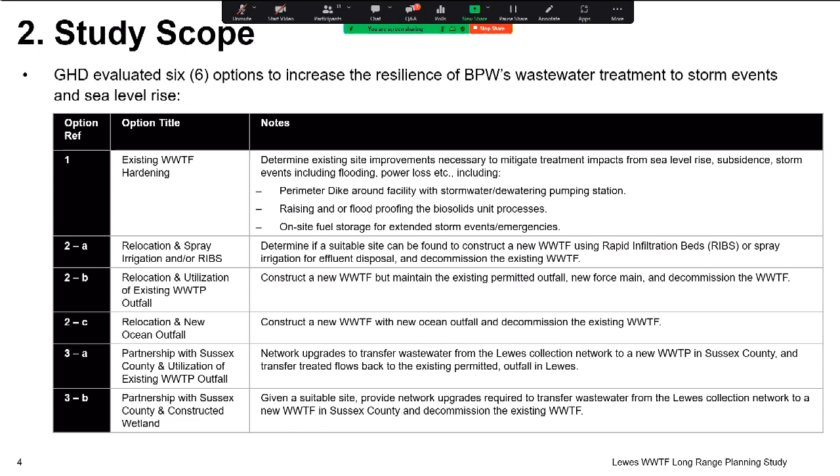So that's a high-level overview of the options. I'll go through each one schematically as we go through the presentation.

Before we get into the concepts and how we've developed them, I just want to touch on some key design criteria for the study. The first one being flood elevation.

As we've already mentioned, a key driver here is to have resilient wastewater treatment facilities here in Lewes. And if we're going to design to specific flood elevations and really understand the risk associated with the future facility, we need to understand what the flood risk is now.

Again, this is a long-range planning study, so we need to project forward to that planning horizon of 2050 and make projections on what the flood elevations will be out into the future. So I'm going to talk you through that process and summarize how we've arrived at these critical values.

To undertake this task, we start with the base flood elevation, defined by FEMA as the elevation of surface water resulting from a flood that has a 1% chance of equaling or exceeding that level in any given year, which is what we refer to as the 100-year flood elevation. Statistically, it would be expected to occur once every 100 years. It's established industry best practice that wastewater treatment facilities should be protected from the 100-year flood elevation, so that's why we start with the base flood elevation.

The graphic on the top right-hand side of the slide is from the most recent FEMA mapping, which was completed in 2015. We've shown the outline of the existing treatment facility in red, and basically for the majority of the site, the 100-year flood elevation is 7 feet.

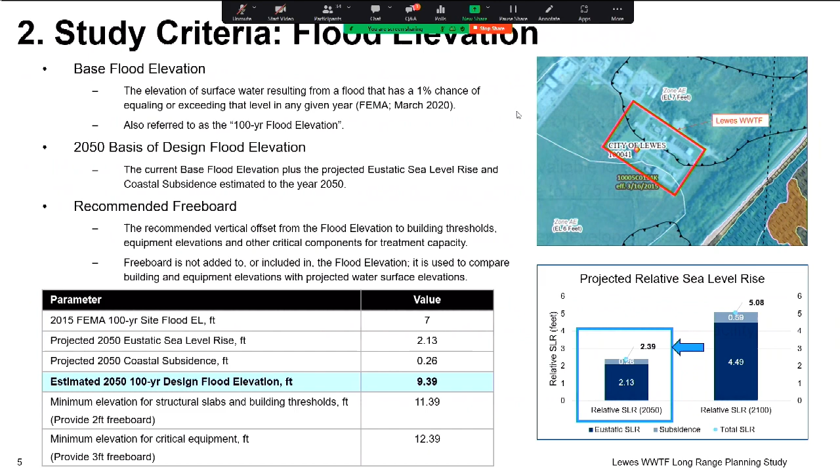The next key criteria are wastewater flow rates. The existing treatment facility here in Lewes is rated for an average day flow of 1.5 MGD, million gallons per day. The current observed average daily flow is actually around 0.9 MGD, so currently the treatment facility typically operates at about 60% of the rated capacity.

The BPW has conservatively estimated that, assuming all available lots are developed per the current zoning designation, the 2050 average day flow will increase from 0.9 million gallons per day to 1.75 million gallons per day. So the concept arrangements for all of the options discussed today have been developed assuming an average day flow from the Lewes collection network of 1.75 MGD.

Under the option 3 scenarios, the partnership with the county, these have all been developed on the assumption that the county in the new facility will contribute an equal proportion of the flow rate to the new facility. So we assume 1.75 from Lewes and 1.75 from the county, giving a total 2050 average day flow for the option 3 facilities of 3.5 MGD.

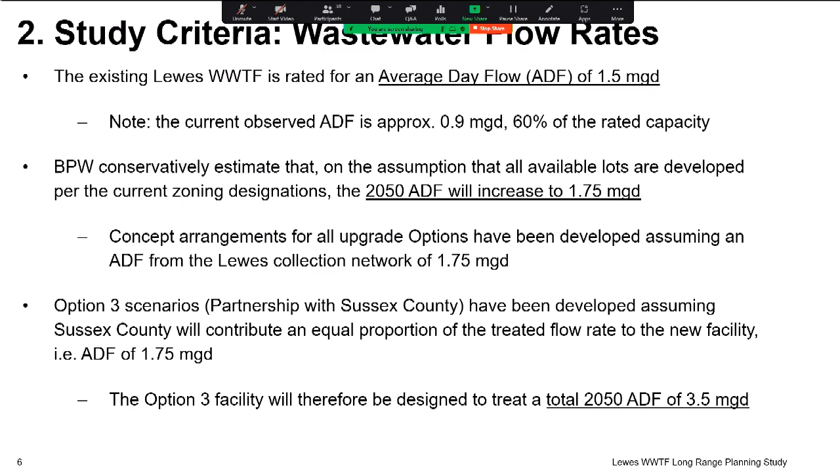The other key criteria is water quality, specifically the water quality for treated effluent. The overriding design criteria and key assumption underpinning all of the concepts is that, irrespective of the option, the future wastewater treatment facility will meet all of the conditions of the existing permit.

Under the option 1 concept, which is to improve the existing treatment facility, that would maintain the existing membrane bioreactor, or MBR, treatment process. Under the option 2 and option 3 concepts, they were developed on the basis of an activated sludge treatment facility with tertiary effluent filtration. I won't go into the details of how they differ, but both are established technologies, and under both it's feasible to meet all the conditions of the existing permit, even at the increased flow rates projected for 2050.

I also want to talk about the relationship between the performance of the existing wastewater treatment facility today, how that relates to the existing permit, and how that in turn relates to future facility performance. As noted, the existing treatment facility operates at about 60% of design capacity, and when operating under those conditions you get much longer retention time in aeration basins, and the key process equipment is loaded at a rate significantly below its upper limits.

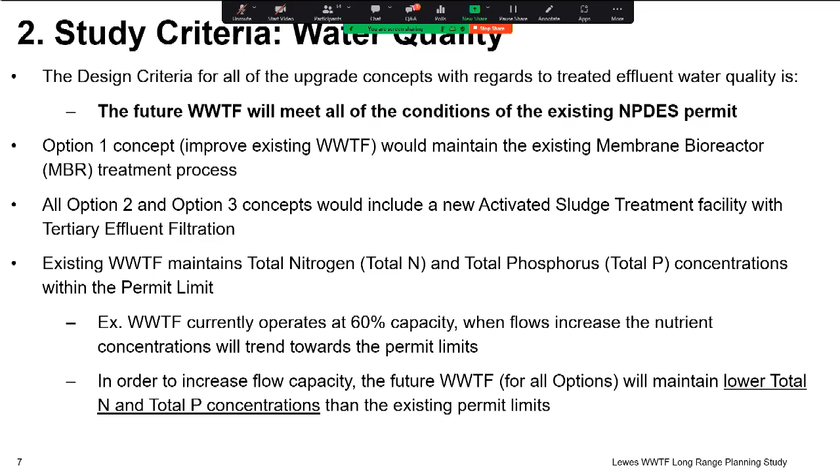So those are the key criteria that we use to develop the concepts. Now I'm going to talk through each one in turn.

We'll start with option one, which is hardening of the existing plant. On the handouts and slides, in the top left-hand side, we have simplified schematics for how each of the concepts will work, and I'll start by talking through that. The two orange boxes represent the two parts of the Lewes collection network, which is broadly split into two halves, the northern network and the southern network, either side of the canal.

Each part of the collection network currently terminates at a lift pumping station. The southern collection network ends at lift station number 4, on Gills Neck Road, close to the bridge on Savannah Road, right in the center of the city. The northern collection network terminates at lift station number 8, on American Legion Road, close to the treatment facility site. Both pump stations transfer flows into the existing wastewater treatment facility, which discharges via the existing permitted outfall.

So under option 1, the key upgrades are hardening of this facility from a stormwater perspective. The key features of that are a perimeter barrier, which I'll talk about in more detail shortly, and a stormwater pump station to clear runoff from within the site.

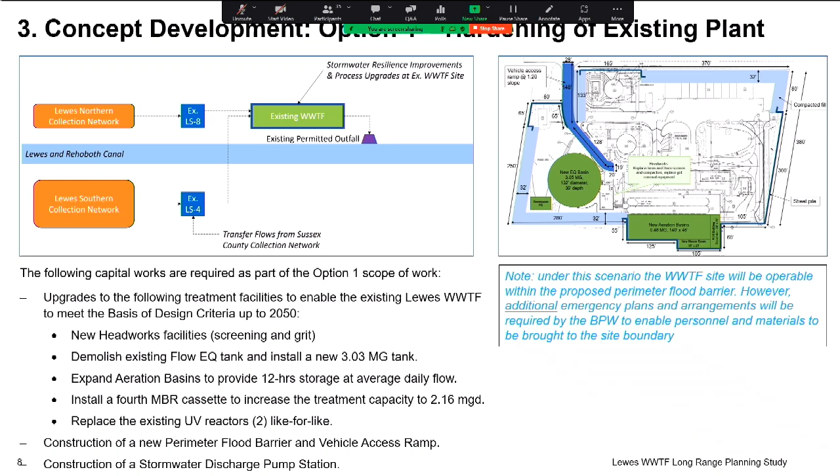Some additional details on the proposed upgrades. We're showing an expanded plan here, showing the perimeter, and in the top right-hand side, a typical section through a compacted fill flood barrier.

This would be compacted fill with a plastic liner on the external side to provide waterproofing, along with a trench where the barrier would extend down into the ground to prevent floodwaters passing beneath it, and a drain on the inside. This is the preferable approach because it's cost effective and will provide the necessary protection up to the flood elevations discussed earlier.

However, in order to provide those threshold elevations, the barrier with the slopes shown, which could be maintained, would be about 30 feet wide. So there are certain parts of the plant where, without considerably changing the location of the site fence, it's not possible to install a barrier that wide.

In those locations, we're showing a sheet pile barrier, shown as the bold, thin lines on the graphic. That would reach the same elevation and provide the same level of protection, but with a smaller footprint. It's not as preferable as the compacted fill on a cost basis, so wherever possible we use the barrier, otherwise it would be a sheet pile. There'd also be a stormwater pump station to transfer flows over the barrier.

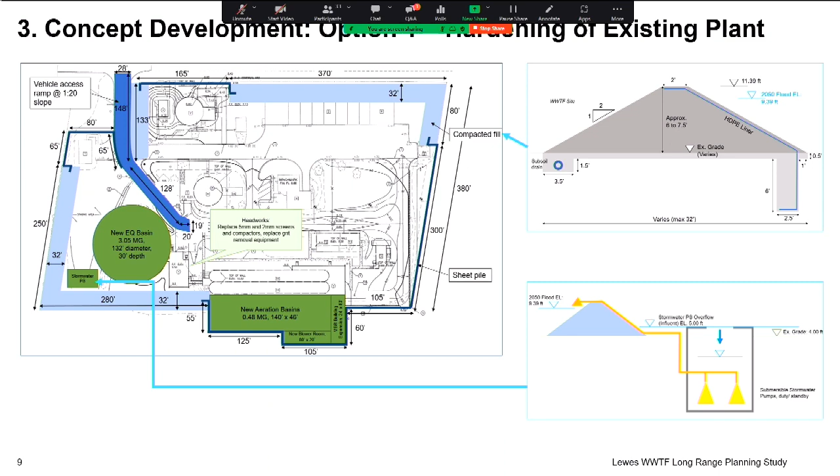The process upgrades are shown in the green boxes, showing the key areas of the site that would need to be upgraded. There's a lot more detail available on this within the report, and if there are any questions later on, I'd be happy to talk through any of the more specific items.

Okay, now we're into option 2, which is option 2A: to relocate the plant to a high elevation site and discharge via spray irrigation.

I'm going to start by talking through a similar graphic, which shows the northern and southern collection network either side of the canal. Under the option 2 concepts, a key part is, in order to transfer the raw wastewater from the Lewes collection network up to a new site, we need to consolidate it all at a single pump station.

Our preference would be to expand lift station 8, which is north of the canal, and make that the consolidated pump station, which would transfer all of the wastewater from the Lewes collection network up to the high elevation site. The reason for choosing lift station 8 rather than lift station 4 is that lift station 4 is right in the centre of the city. It will be a lot more disruptive during construction and in future maintenance, it's much more visible, whereas lift station 8 is a little bit more out of the way on American Legion Road.

So under all of the option 2 concepts, a new raw wastewater pumping station would be constructed at the same site as LS8 on American Legion Road, transferring flows up to a new wastewater treatment facility, which would be an activated sludge facility. Under option 2A, the treated effluent would be discharged via spray irrigation.

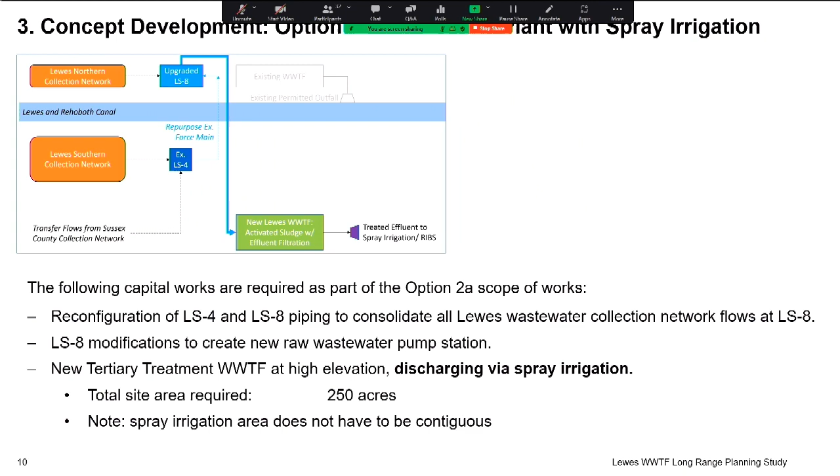Here I just have a graphic showing what the treatment part of the facility would look like. In the top left-hand corner, this is common to all option 2 concepts, and it shows the key treatment facilities that will be required at the new site, and that's only a proportion of the land required under option 2A. That includes the headworks, the aeration basins, clarifiers, and filtration and disinfection at the downstream end. That's within the light blue dashed box in the top left-hand side.

Under option 2A, per the DNREC requirements, we would also provide 45 days storage at average day flow for treated effluent before it goes to the spray application. That's why there are the additional effluent storage lagoons in this option, requiring just over 80 million gallons. There will then be an effluent pump station, which will transfer the treated effluent off to the land application sites, which are not shown on this graphic.

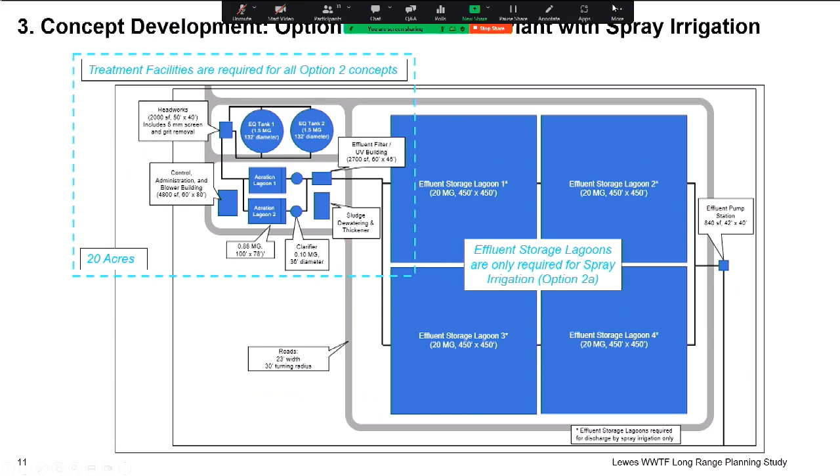So under option 2B, again, I'll start by talking about the schematic on the left-hand side. Again, the Lewes flows will be consolidated at an upgraded lift station 8 pump station, transferred to a new high elevation site. But this time, rather than land application, there will be a new transfer pump station which will pump the treated effluent back to the existing permitted outfall on the canal here in Lewes.

The other graphic I'm showing here is a schematic arrangement for the new consolidated pump station. I won't go into all the detail on this, and happy to answer questions later, but the key point is, on the existing site, where the existing lift station 8 is, the new larger facility could be constructed offline, and then all the piping connections made at the last minute, or the last possible moment, to minimise the disruption on treatment facilities during the construction phase. So that's option 2B.

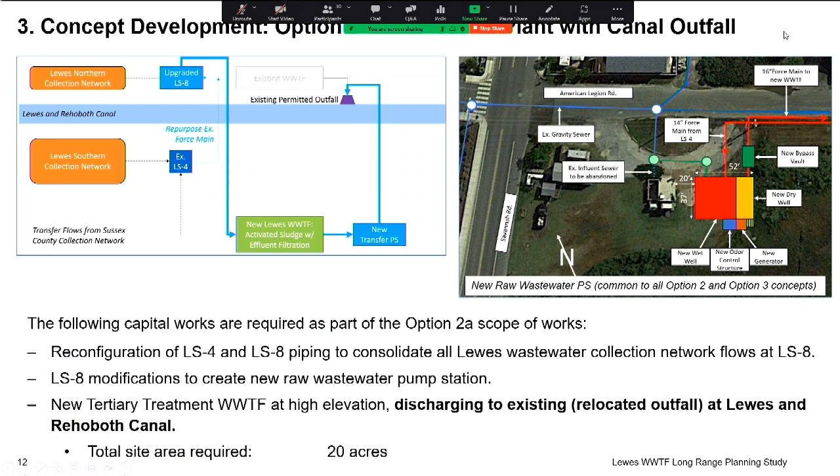Under option 2C, again, the flows are consolidated at an expanded raw wastewater pump station to a new high elevation site, but this time the treated effluent transfer pump station takes flows out and discharges via a new ocean outfall. The diagram on the right shows a potential alignment for a treated effluent force main.

I'm just going to talk through the key components of that briefly. The section shown in green along East Savannah Road that comes past the wastewater treatment facilities will be the first section, coming up the same road towards the beachside areas. The section in yellow would pass through Cape Henlopen State Park, although it would be installed within Cape Henlopen Drive, which is already a paved road. So although it goes through the state park, it would be installed within essentially an already paved area.

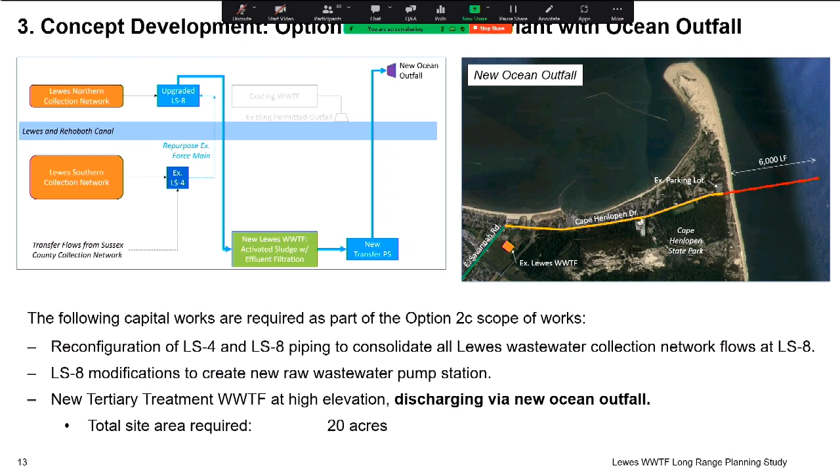Then the final section, shown in red, from the existing parking lot out offshore, would be the new ocean outfall section. Based on comparable arrangements in the region, we have made an assumption that it would need to be 6,000 linear feet offshore to get it out of the beach zone. That's option 2C.

So now into the option 3 arrangements, which is the partnership with Sussex County. Under these scenarios, again, we show the Lewes collection network and its two components, with flows being consolidated at an upgraded lift pump station 8.

But under option 3, rather than going to a high elevation site within Lewes, the flows are transferred to a new county facility at the existing Wolfe Neck site. Schematically here, we show the Lewes BPW Sussex County boundary.

As Tom mentioned, as you're already aware, there is an existing agreement in place which has an existing scope boundary, and all works on the Lewes side of the boundary are the responsibility of the BPW in terms of capital expenditure, and on the county side, vice versa, it's the county's responsibility. I'll mention that now because it will become relevant when I talk through the cost estimates.

So we have the Lewes collection network sent to the new site, and I'm also showing here a component of the Sussex County collection network. This concept has been developed on the assumption that the county will contribute the same proportion of flow, so 1.75 MGD from the county network, as well as the 1.75 MGD coming from Lewes. Under option 3A, flows will be treated at the new site, and again there's a new transfer pump station.

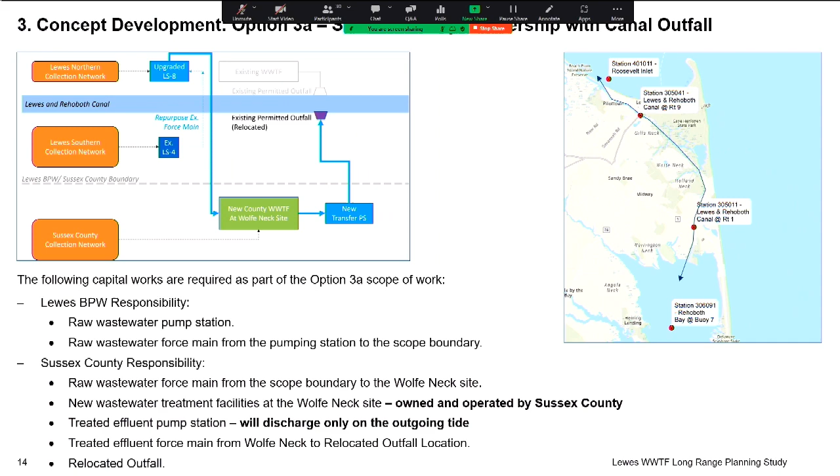Option 3B is very similar, except for the discharge methodology -- rather than pumping back to the existing permitted outfall, it will be discharged via a constructed wetland. Again, the new facility will be owned and operated by the county, and treated effluent will be discharged on the outgoing tides.

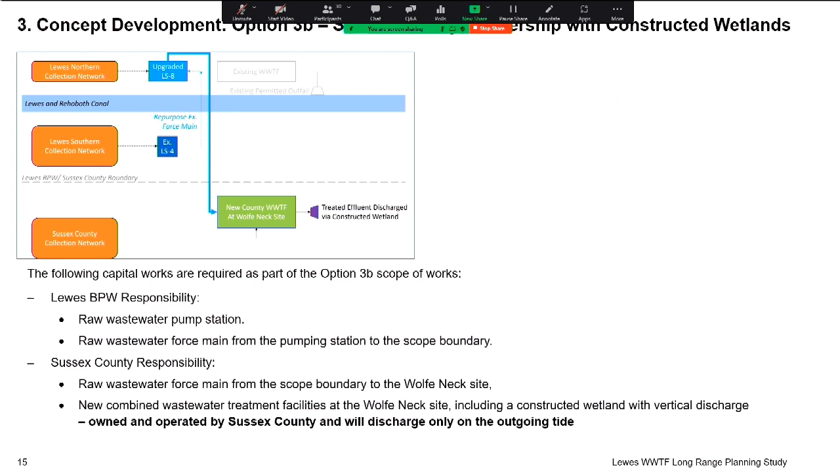So that's a high-level overview of each of the concepts and how they were developed. Now I'm going to talk you through the concept evaluation, which has two component parts. We do a cost evaluation, which I'll get to shortly, and we also have undertaken a multi-criteria analysis, or MCA. The purpose of the MCA is to evaluate each of the concept arrangements based on a series of non-cost criteria. So clearly cost is always a factor, but before we focus on the financial implications, we also like to evaluate each of the concepts on its own merits.

In what ways is it able to meet the aims of the project, and in what ways is it potentially lacking? So the approach for the MCA is that we developed a series of evaluation criteria, performance measures, and a rating scale, which we use to evaluate each of the concepts.

In terms of the rating, under an MCA approach, a high score is good. So if we rate things from 1 to 5, a rating of 5 would mean that a concept, under a certain criteria, will perform better than the other options we're evaluating, and vice versa, 1 would mean it performs much worse. So that's the rating, and we also assign a weighting, which reflects the relative criticality of each item -- not all criteria are equal in terms of how we evaluate this.

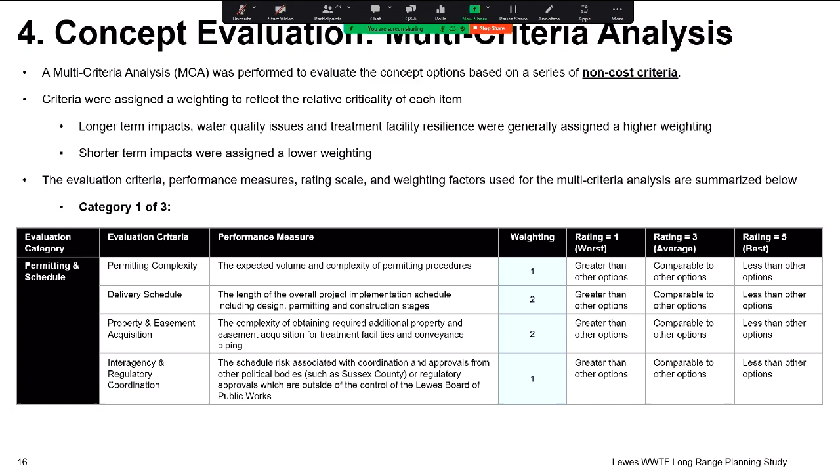Second category is community and environmental impacts, which is the biggest and most critical category. These criteria include stakeholder impacts in the construction stage, so temporary impacts to the community, predominantly due to traffic volume, road closures, noise, and other factors associated with construction. Another criteria is long-term stakeholder impacts, which could include ongoing site traffic, site odor, aesthetics, and any other factors peculiar to a particular concept.

Water quality impacts for inland bays - this is one of the most critical criteria, the likelihood that the proposed treatment process will negatively impact the water quality of the inland bays. Equally, another critical criteria is overall environmental risk, so the likelihood of an environmental impact due to failure or flood damage at the treatment facilities, force mains, or any of the pumping facilities.

Then we have sustainability, energy and chemical use, relatively self-explanatory, and land use within the city - so the amount of land required and how that may impact other plans that may be in place for future land use within the city.

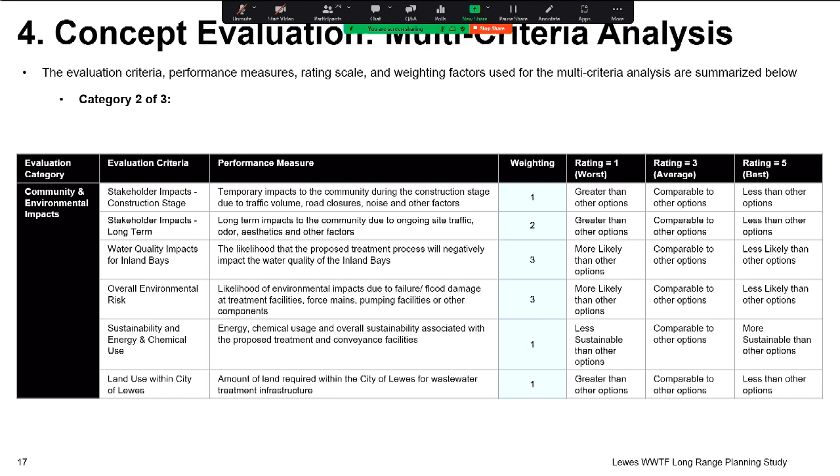And the final category relates to operation and maintenance, so post-construction. The first criteria is impact to the wastewater treatment facilities during construction - in undertaking any of these upgrades, do we compromise the treatment facilities in the short term? We also have operational complexity, which is the level of operational effort required to maintain the treatment facility performance, and the difficulty in obtaining qualified staff, which has been a significant issue for the existing treatment facility. So that's another critical criteria.

And the final one is future flexibility. This is a long-range planning study, so we have made projections based on the current modelling and current thinking. We've come up with concepts that we think will address the long-term requirements. But should things change in the future, it would certainly be favourable if an upgrade option could be adapted to have some flexibility and meet those future constraints.

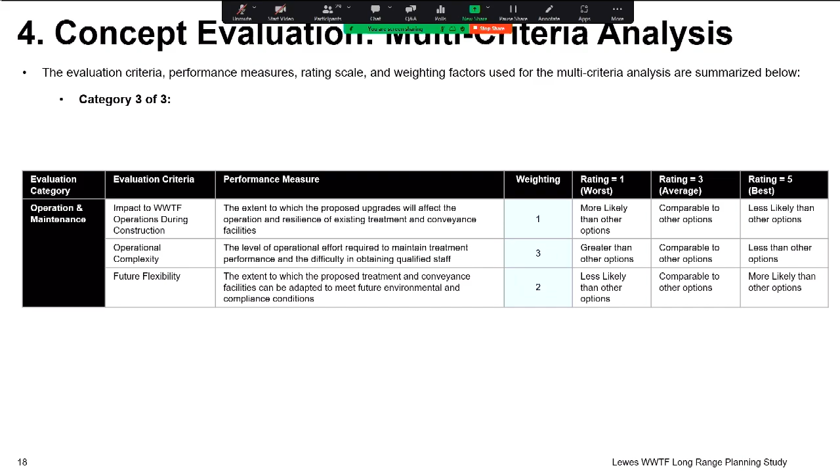Okay, so those are the criteria and the categories they fall into. Now I'm going to give an overview of the MCA scoring. The detailed scoring and rationale is provided in the report on the BPW website. I'll give a high-level overview of the key findings. The graphic on the right summarises the scoring.

In terms of an MCA evaluation, it's an interesting result in that there are clearly two levels of total score. Option 1 and option 2 concepts all scored 65 or 66, and option 3 both scored 95. So although a lot of the total scores are consistent between options, the makeup of each score is different in each case - you'll notice the bars are split into different colors.

Each different colour relates to one of the MCA categories: permitting and schedule, community and environmental impacts, and operation and maintenance.

Option 3A and option 3B have the joint highest MCA scores. Option 3A scores higher for the permitting and schedule category, due to the relative uncertainty associated with the constructed wetland discharge arrangement under option 3B. To fully understand what that concept would look like and how it would perform, there's additional field investigations and engineering analysis needed. For that reason, we can't score that concept with the same confidence as discharging via an existing permitted outfall.

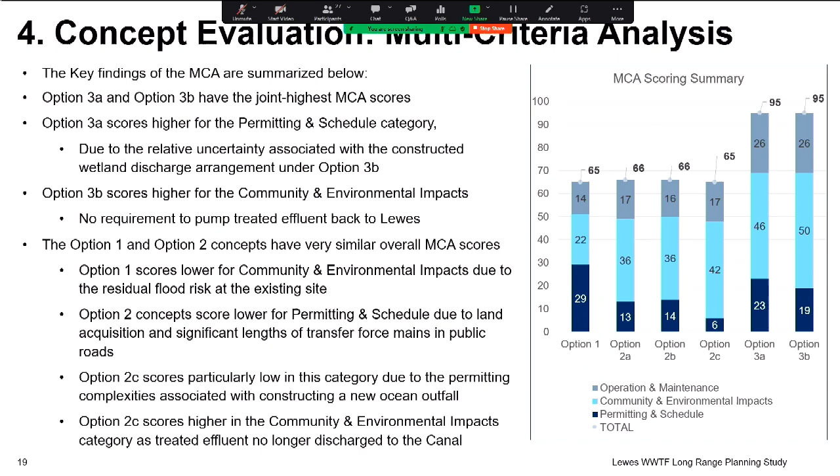The second part of the evaluation is cost. Within cost, we also have several components: the first is the capital costs, the upfront costs, which I'll talk through in a moment, and the second part is operation and maintenance - the ongoing running costs for a new facility.

I'll start by talking about capital costs. We developed the concepts, did preliminary sizing, and then costed the key components of each option. I'll note that the costs presented are those that will be incurred by the BPW only - any costs incurred by Sussex County under the option 3 scenarios are not included in the analysis. These are all costs to the BPW.

We look at any land purchase required, demolition, decommissioning of the existing wastewater treatment facility, network upgrades including pump station upgrades and transfer force mains, site civils - predominantly excavation, site roads, architectural, heating and ventilation costs - essentially the costs for new site buildings, structural concrete, tanks, slabs, other things, mechanical and process equipment, and electrical upgrades.

General conditions is a component that's common for large construction projects. It represents the cost to a contractor associated with mobilising, demobilising, setting up site facilities, contractor overheads, that kind of thing, and that's really a function of the other costs.

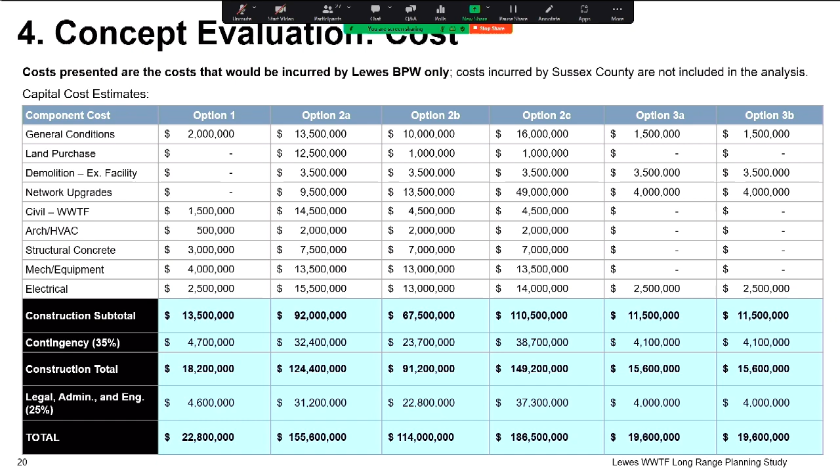And so that's the capital cost. The second component are the O&M costs. Again, we're just presenting the costs incurred by the BPW, not the county. So we start this evaluation by estimating the annual operation and maintenance costs for each option.

And these are presented in 2022 US dollars, because that's when we completed the report a few months ago. There are three categories. There's the treatment facility operation and maintenance - the cost of staffing, the cost of energy, cost of chemicals to run the facility day to day. There's also periodic equipment replacement, which, depending on the type of facility, if there's more complex equipment or equipment with a shorter operational life, more moving parts, etc., it needs to be replaced more frequently, and we represent that as an annual cost over the lifespan of the facility. The third category is transfer pump station energy use - the costs associated with moving wastewater between different sites.

And the key differentiator in the annual costs really is the operation and maintenance costs associated with option one. That's because option one would maintain the existing membrane bioreactor facility. It's a more complex facility, and based on observations we have in the region of the cost to run a facility like that, compared with an activated sludge facility, it's generally a more costly process to run, and that's reflected in these figures.

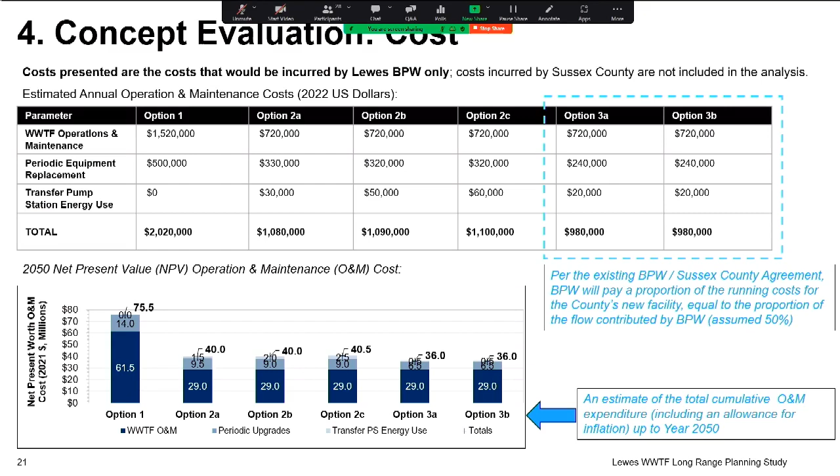So let's try and bring all that together. We then take the two components of the cost estimates - the capital costs and the net present value cumulative running costs - and we come up with a project lifecycle cost. So the total cost to the BPW to design, plan, build the new facility, and then run it up to the year 2050. We add together the two individual cost components, and that gives the project lifecycle costs presented in the graphic in the handout. They vary from close to 56 million for the option 3 scenarios, to option 1 up to close to 100 million, and the option 2 scenarios are significantly more, 150 million plus. The project lifecycle costs are at the middle row of the summary table.

We're also showing here the MCA scores that were presented earlier, and to try to bring the two components of the evaluation together and give an indication of the best value for money option to the BPW, we take the project lifecycle cost and divide it by the MCA score to come up with a cost per MCA scoring point. Now the option 3 concepts are the lowest cost and have the highest MCA score, so it follows that, based on the criteria established and this evaluation, the option 3 concepts would provide the best value to the BPW.

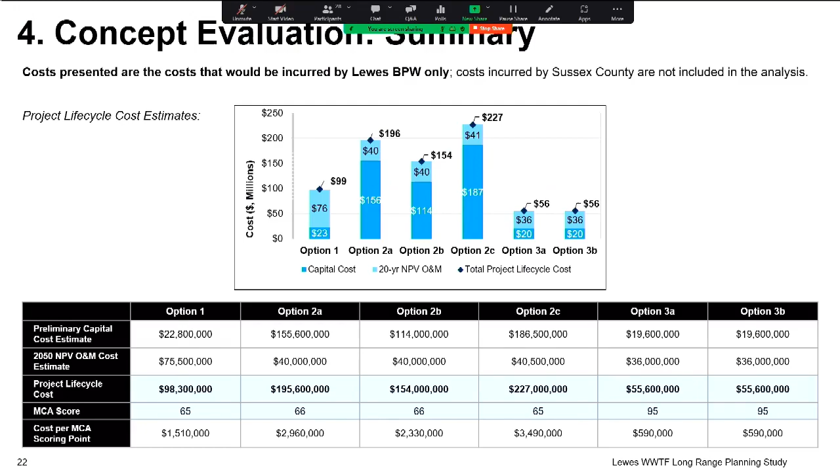And at that point, I will hand back to the BPW, I believe Austin, to talk you through the estimated ratepayer impact. So just so everybody knows, there's a test at the end, so I hope everybody's taking notes.

When we took a look at this, one of the things that had come up, and Tom had actually brought it up at the public workshop when GHD first gave us the presentation, is that obviously there's an interest in what the impact's going to be to a customer. So what we tried to do is break it down as a percentage impact so that you guys could each go home and take a look at your sewer-only portion of your bill and calculate what each impact would be.

For example, if you're doing a 55% increase, you'd take whatever your bill is times 55% and add that, and that's your increase. And you swing all the way up to a 400 plus increase, so you would be 4 times whatever your bill is. Obviously, when you have a swing of cost from $20 million to $187 million, those are some big numbers we're throwing around.

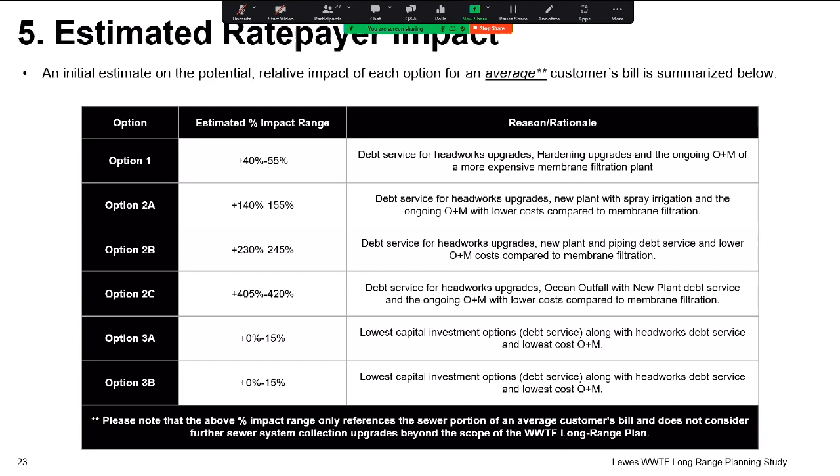Last one, conclusion. Very quick, next slide please. Okay, so just as a very high-level summary of what was presented, and then we'll get into questions: the 3 options being considered all have pros and cons.

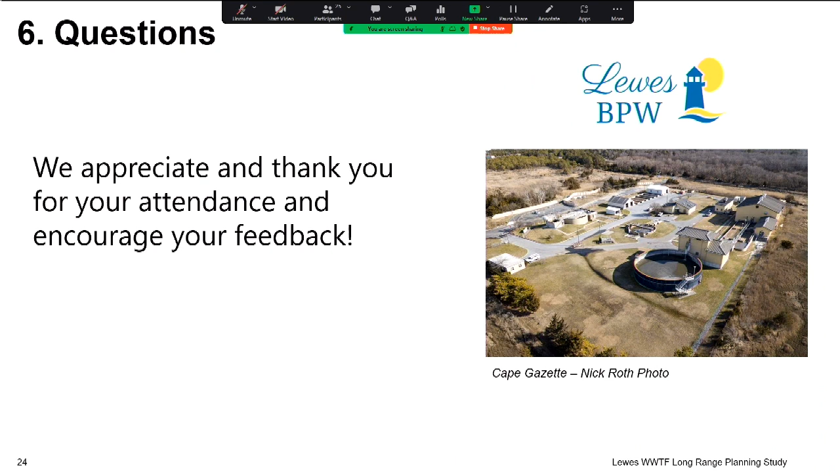Option 1 is on the lower cost side, but as was pointed out, it does not eliminate the risk of being in a susceptible area. It does reuse the existing facility, and it has a lower regulatory hurdle because it's already licensed. There is potential for construction interference on the site because we'll be building berms, driving piles, and building a new oxidation ditch on the existing site. So it does make construction more complicated — it's not prohibitive, but it's just not a greenfield site.

And as pointed out by Tom, of all the options, it has the highest ongoing operating cost due to the use of membrane systems, which use more energy. They draw vacuums and pressures, and it takes more to operate that plant electrically than the other ones.

Option 2 is remote from the ocean and at a higher elevation for the sites we would choose, so you're less at risk from sea level rise, hurricanes, and such. As Tom pointed out, it can be built offline so you can have the whole facility up, running, and tested, and then just tie it in. It does have the highest capital cost due to both land acquisition and the cost of running the length of piping to and from the facility.